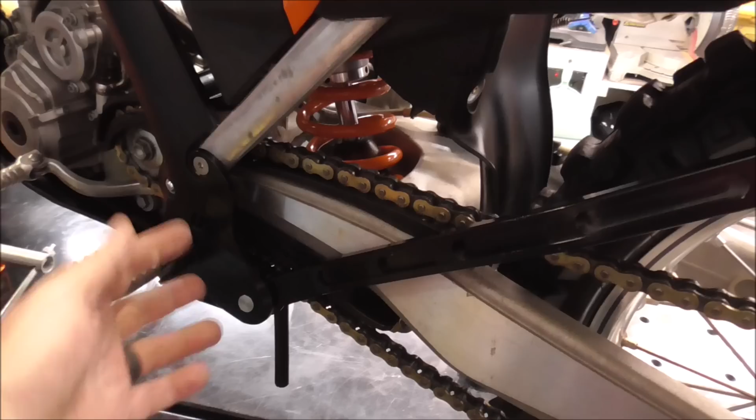So I've got the bike propped up vertical on this table, and you can see the original kickstand right here. We'll have to take it off, and it's got the bottom feet that are screwed in. Well, that would work if we didn't have to cut so much out of it, but as you can see, there's actually a recessed notch in this kickstand, which is going to make this area where we'd have to thread non-existent. We're going to probably end up having to cut it off down in this area somewhere.

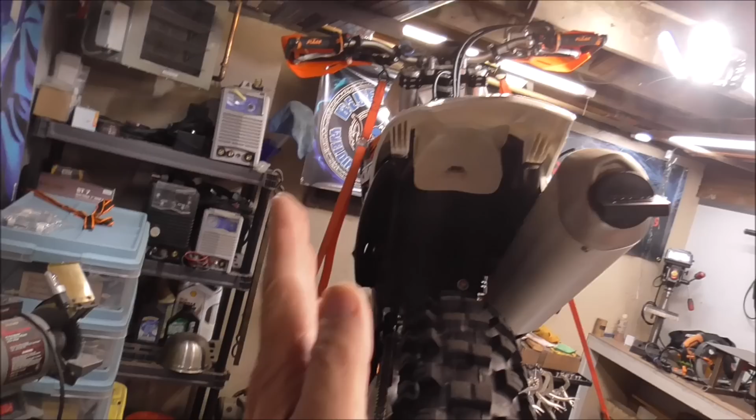Wow, guys, that's going to be a lot. We're going to end up taking off this kickstand. So I've put some lean on the bike a little bit to simulate where I want it to sit. And now you can see how much we got to take off this kickstand. It's way down here, which is about 3 inches that we have to take off it.

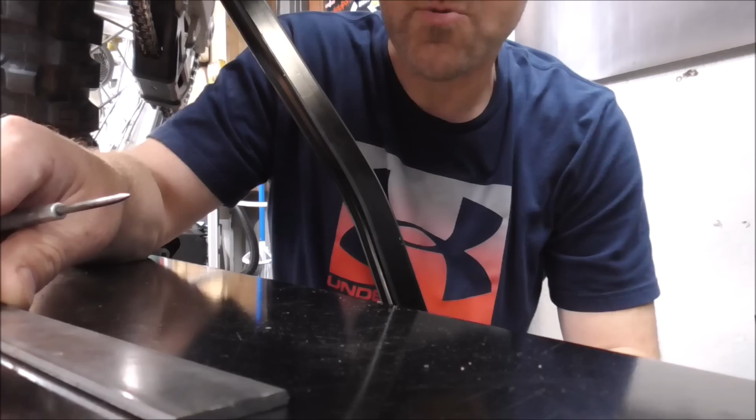So what we're going to do is take a piece of flat bar and just make it contact the kickstand, and then we can scribe it using a scribe right along the back edge and all the way around.

Now we'll turn it, put a mark here. Then we'll do the same thing on the back side with another mark.

You can even wrap it around the front just a little bit by hanging the metal off the front edge, and that'll give us a nice straight line to cut by. Now we just got to take off the kickstand, which is these two bolts, and we can go cut it.

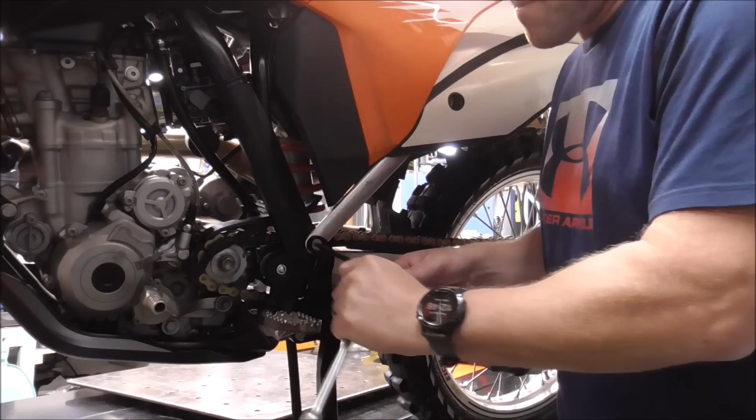And start our fabrication. I think they actually make a lowered kickstand for this bike for doing these modifications, but I had just bought the kickstand.

My wife just recently rode this when we went on a little trip together, and she kind of fell in love with the bike. That prompted me to go look for a bike for her right around this size. I really couldn't find one. We did the next best thing, and I gave her mine, but she's a little too short for it, and I went out and bought myself a new 450.

So everyone really made out. My wife wound up with a bike that's super comfortable for her. It's powerful, and it'll be challenging for her for a little while, and I ended up with a new one for me. This will last her many years to come.

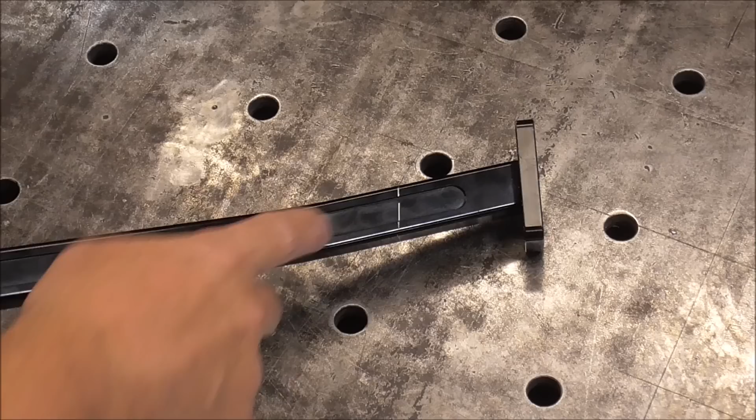Now you can see our cut mark all the way around, and now you can actually see why we can't just re-bolt it on. I had originally planned to just take out these two screws, cut the kickstand shorter, and then just re-drill and tap it. But for obvious reasons, you can see these screws go into this thick meaty part of the aluminum kickstand. We need to cut the kickstand way up here, and these ribs or webs just aren't wide enough to drill and tap into to hold those screws.

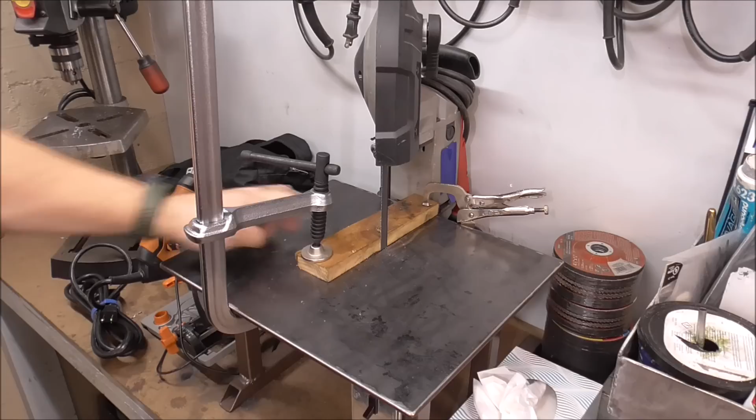The only other alternative is going to be to weld it. What I've done is just clamped a little piece of wood to this table, and I'll show you why, because I'm going to need to feed this kickstand through with this side touching and this side touching here. That cut right there is plumb up and down. That's the angle we need to get the right bevel on this.

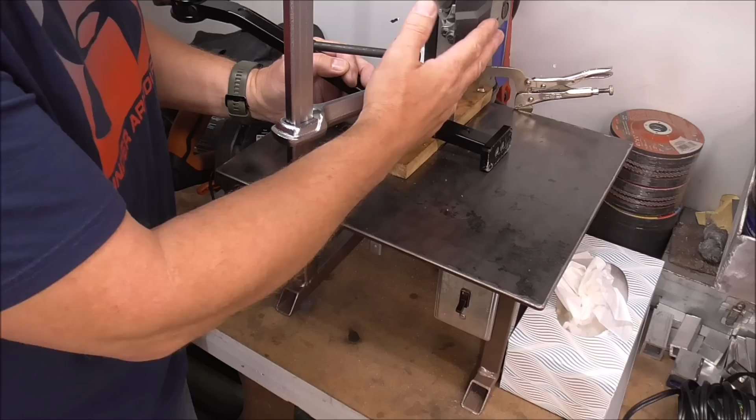All this is, guys, is my portable bandsaw stand that I built. I have the material cut list and all the details about this on how to build it, and I'll have a link to that video. Super easy. So if you have one of these portable bandsaws, this is an awesome tool so that you use your bandsaw all the time, because there was a while I just wasn't really using it. I use it every day now just because it's so handy to have set up like this, and there's only one clamp and this comes right out and can be used like a regular bandsaw.

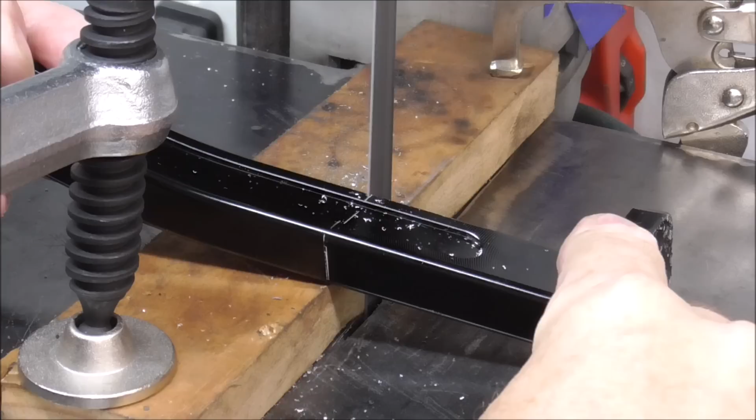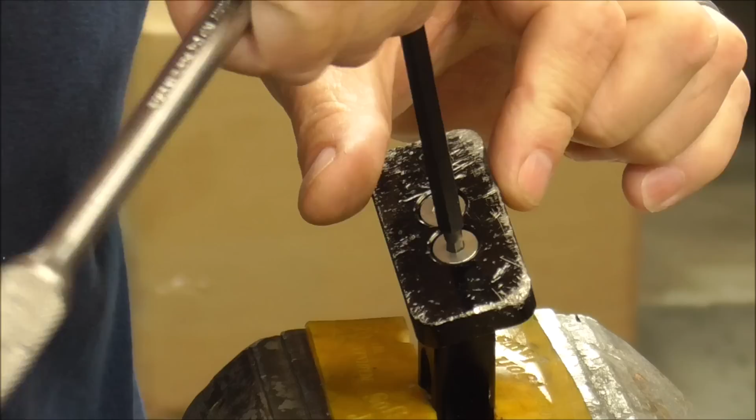Alright, let's cut this up. Now we'll get this clamped in the vise so we can get this foot off. This is the part we need to keep.

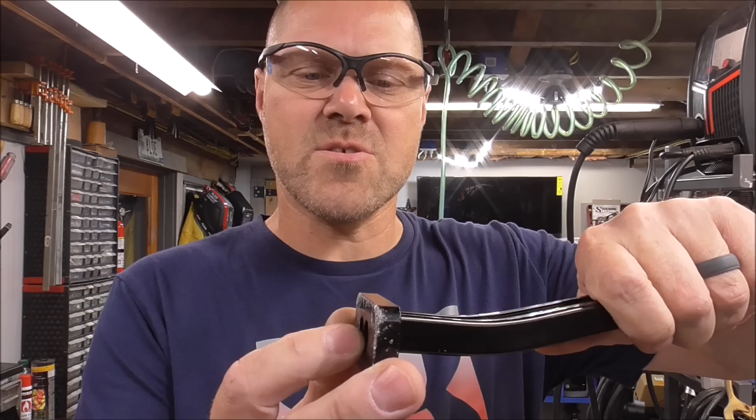Now the next thing we got to do is get this paint and finish off this pad, and get the paint and finish off this so we can weld these two pieces together like this. I'm going to clamp this up in a vise and use a stainless steel wire wheel on it.

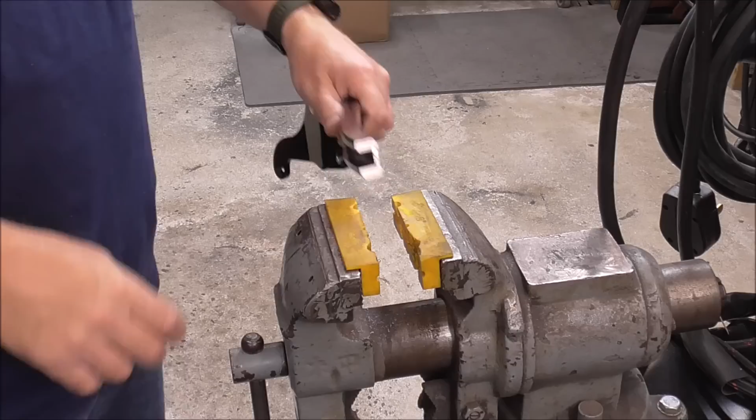Now I'm going to try to be real careful because I don't want to take off way more than I have to. I'm going to end up taking off some, and we'll have to end up repainting this, but it's inevitable. I'm going to do the best I can.

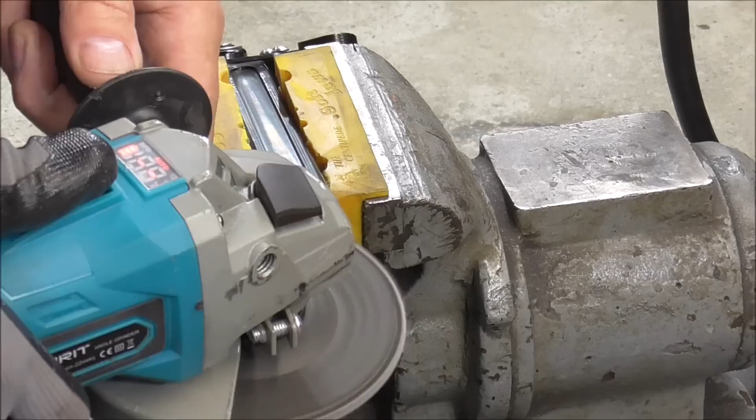Because I know that MIG welding aluminum leaves a big bead, I'm going to V this out just a little bit. You can see I got the edges all beveled back. It just gives the weld a nice place to go. Now I'm going to do a final cleanup with a flap disc just to remove any of the contamination from the paint that the stainless steel wheel might have put into this part.

I'm going to take a minute to talk about the setup. For this I'm going to be using a spool gun, but you don't have to use a spool gun, and I'm going to explain the reasons why.

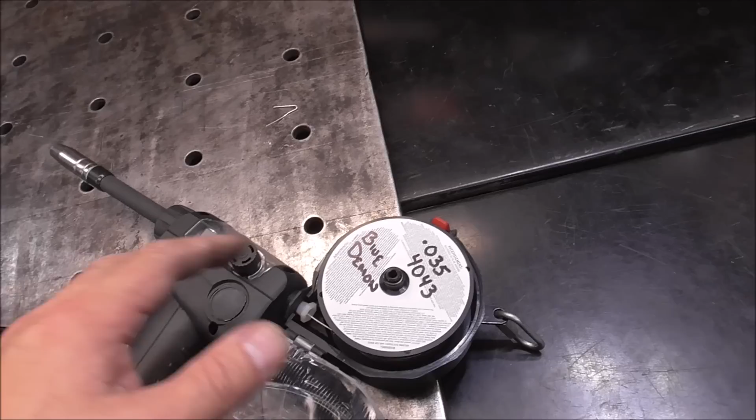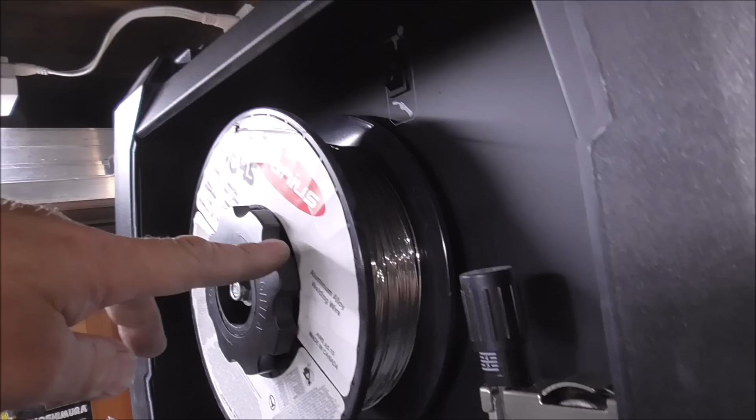I'm using Blue Demon 35 thousandths 4043 wire. The reason I'm using 4043 is that it's a little bit softer. It runs a little bit better. Basically, it just goes in a little bit smoother for me. But you can also do the same exact thing by switching out the liner in your MIG gun for a Teflon liner and then just running aluminum straight through that. I've done that many times. As you can see, I'm all set up with 45 thousandths wire right now to do this.

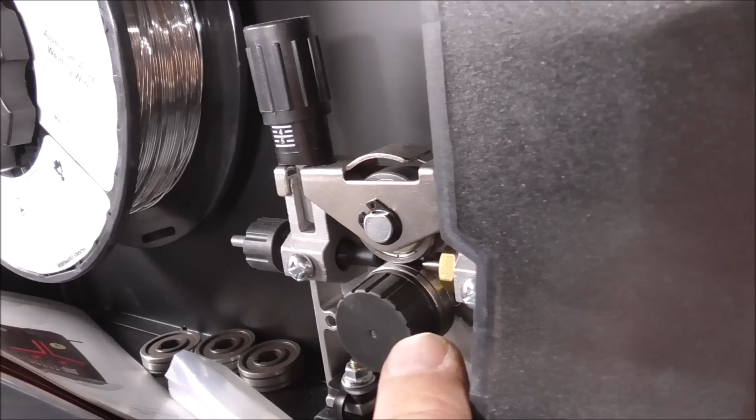Very little things that you have to do differently. You just use a U-groove drive roller that's designed for aluminum, and you're going to want to use 5356 wire. The reason for that is that 5356 wire is a little bit harder than the 4043. If you try to run the 4043 wire through your MIG gun liner whip and it's extending all the way around, you're going to have problems because it's not going to want to feed down through it. 5356 wire is a little bit heavier duty, and you're going to be able to have a lot better results. 4043 wire, on the other hand, is super soft, and it's only got to push from here to here before it comes out the MIG gun.

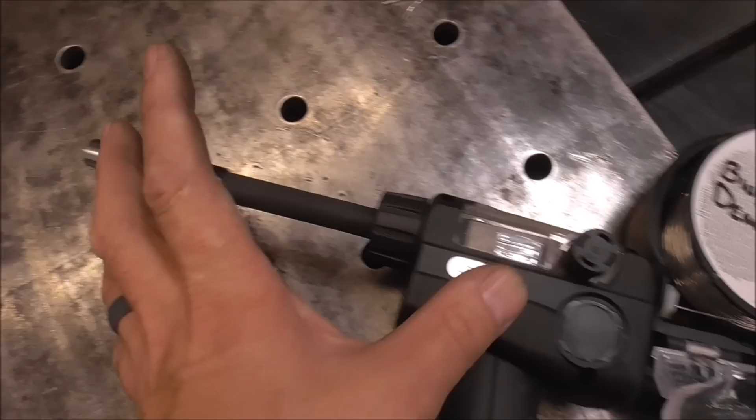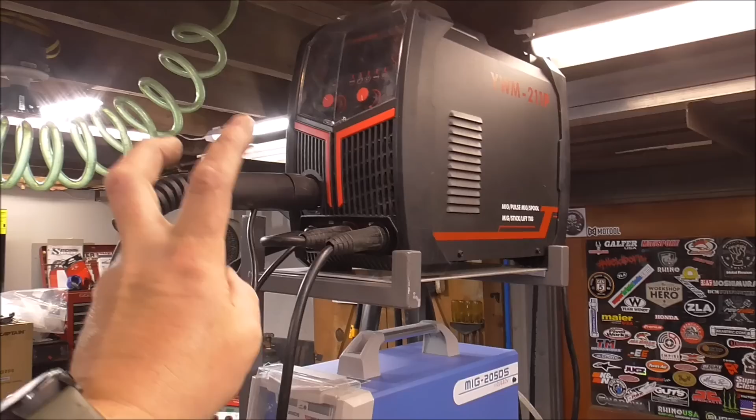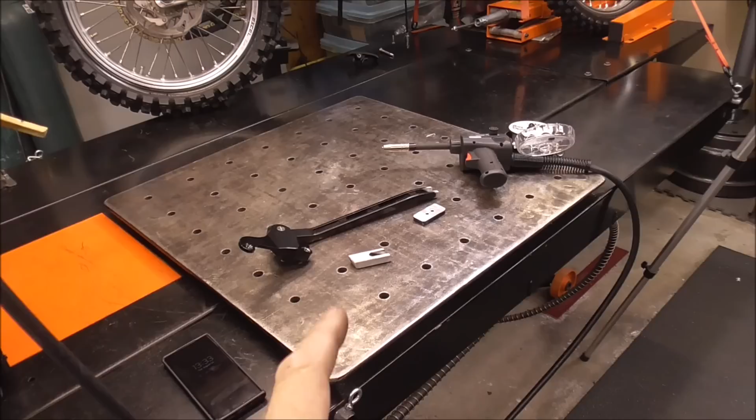That's the advantage of having a spool gun, is that you don't get a lot of the feed issues that are associated with what's called a push style gun. The wire is pulled off the reel and then pushed through the liner, however long that liner is, whether it's 12 feet, 10 feet, or 15 feet. The longer this MIG whip, the more problems you can have with it bird nesting. The spool gun just helps eliminate a lot of those issues.

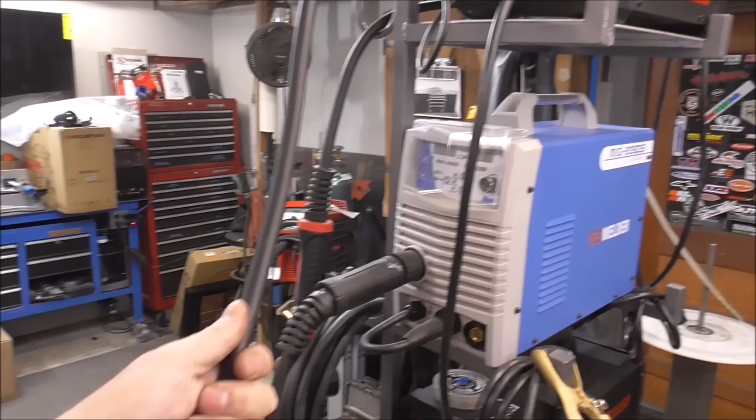But don't get me wrong, I've done a lot of MIG welding with aluminum through the standard MIG gun that comes on it, and you'll have no issues whatsoever as long as you set your machine up properly. I have a video that talks all about that, and I'll link it up above. So for this process, you're going to need a MIG welder, or a MIG welder that's capable of having a spool gun hooked to it, like I have here. You're going to need a bottle of straight argon gas, and you're going to be welding on DC electrode positive.

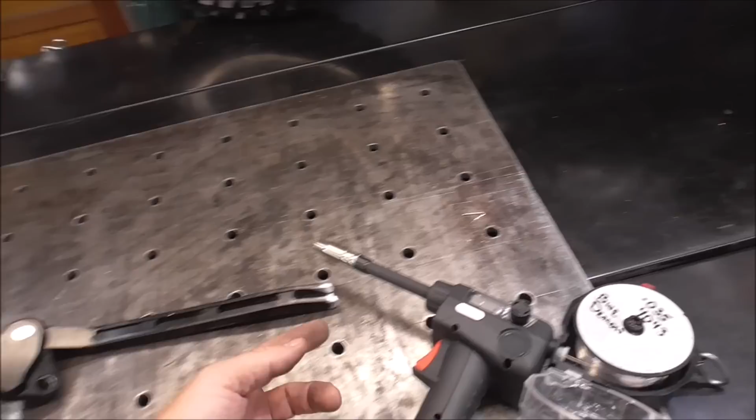Now, a lot of people say, well, I don't understand, why can't you weld aluminum with a MIG welder? I thought you had to have a TIG welder, and it's got to have AC power. It does, honestly, guys, and I really don't know the reason behind that. It just works. This is designed for this. This just works. I think with the AC, when you're doing TIG, you do have that AC sine wave, which helps clean. So for this, I find that you just got to do a lot better job making sure that all your parts are clean, because you're not getting that cleaning action like you do with AC. I'm sure that somebody who's a lot more technical could explain the difference between AC TIG and DC aluminum MIG welding, but that's not what this video is about.

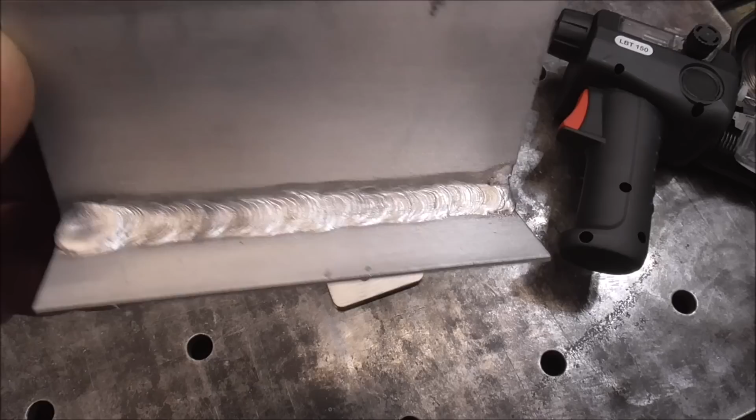I'm just showing you the practicality that you can do it, and it works great, and it actually provides a good looking bead. You can see, guys, this right here was MIG welded. This is a MIG welded joint. It kind of almost looks like TIG. It lays in there nice. You can see it's got good penetration. You can see it actually has on this side some transfer. It's gone through. That's actually not overly desirable, but it does prove that you can get a good bead appearance, and that laid in really nicely right there.

And that was done using a MIG welder, just like this right here. I'm using pure argon, and I've got it set for 30 CFH.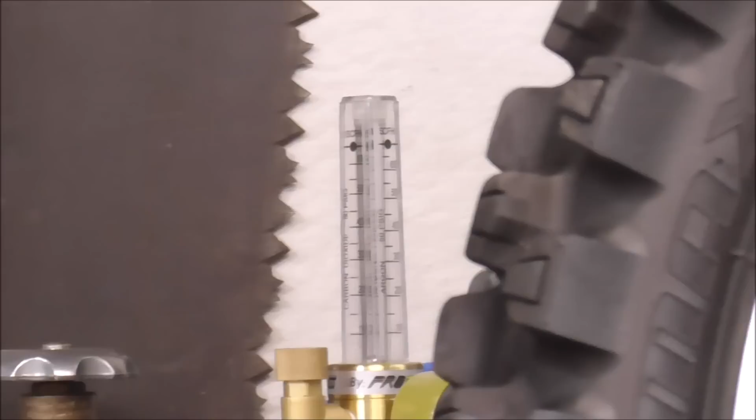I'll pull the trigger over here, and you can see where the ball goes up. There it is right there. I'm using 35 thousandths Blue Demon 4043 wire, and I'm using it on the Yes Welder YWM 211P.

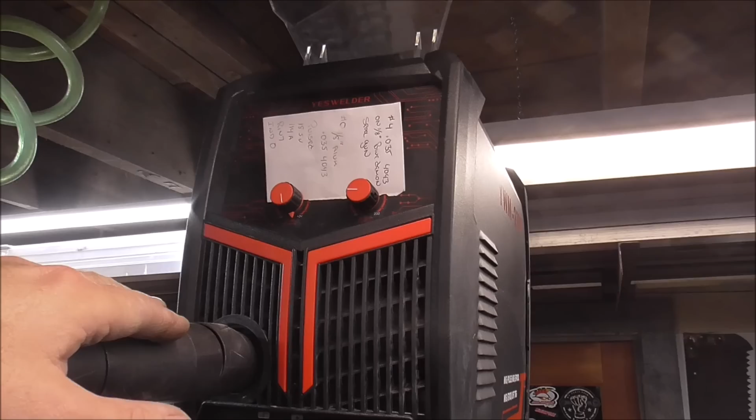You can see I've got a chart that I use for most of my aluminum welding. Once I find a setting that works good, I write it down and store it, leaving this chart right in there.

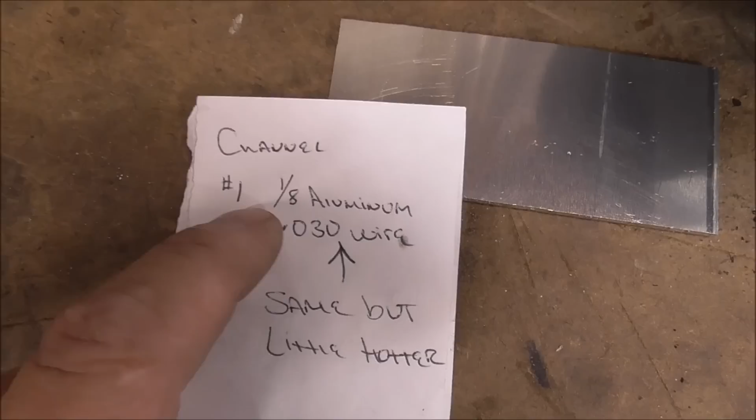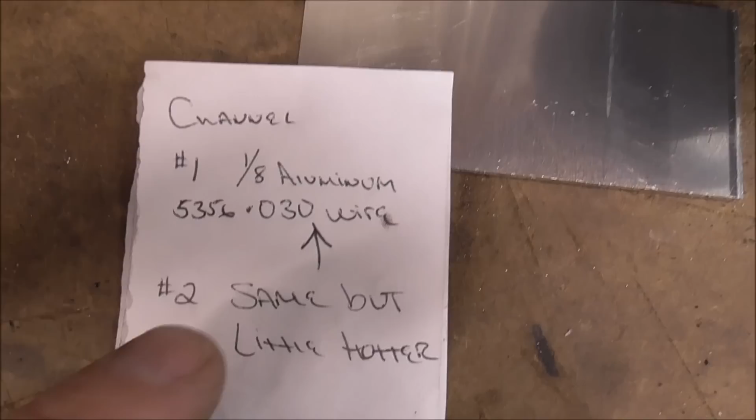Channel 1 is for 1/8 inch aluminum using 5356 wire, 30 thousandths, but that's using it with a liner, not a spool gun. Channel 2 is the same, but a little hotter.

So if I'm doing a butt weld, I may want setting 1. If I want it a little hotter, like for a T-joint, I can set it for number 2, knowing it's the same.

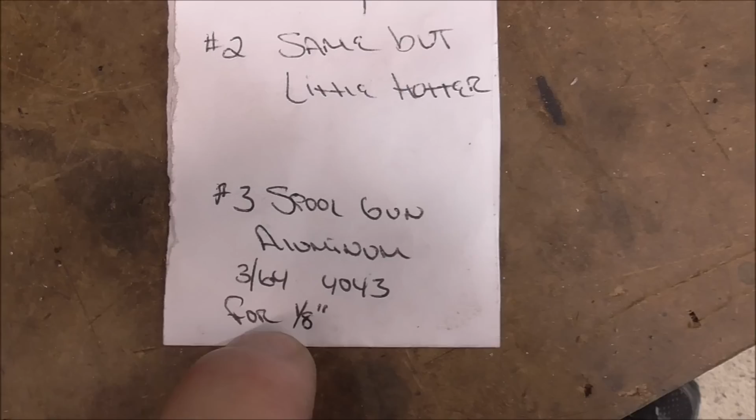Number 3 is for a spool gun with aluminum, using 3/64 4043 wire on 1/8 inch metal. Number 4, what I'm on right now, is 035 wire 4043 on 1/8 inch material, using Blue Demon wire with a spool gun.

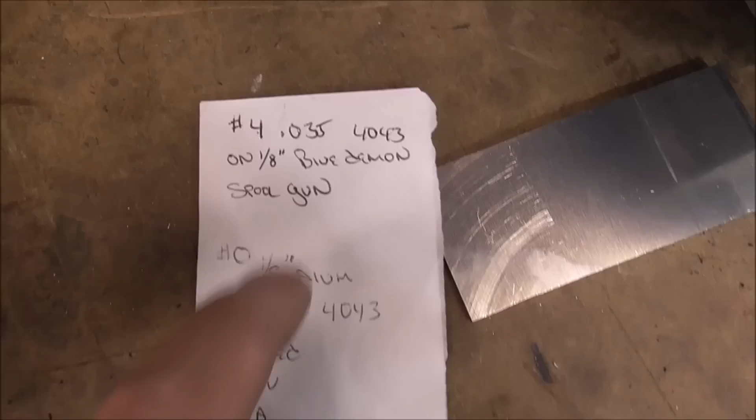Some wires just run a little different than others, so I mark the wire brand I'm using so I know. That's what I'm on right now. Setting 0 is 1/8 inch aluminum, 35 thousandths 4043.

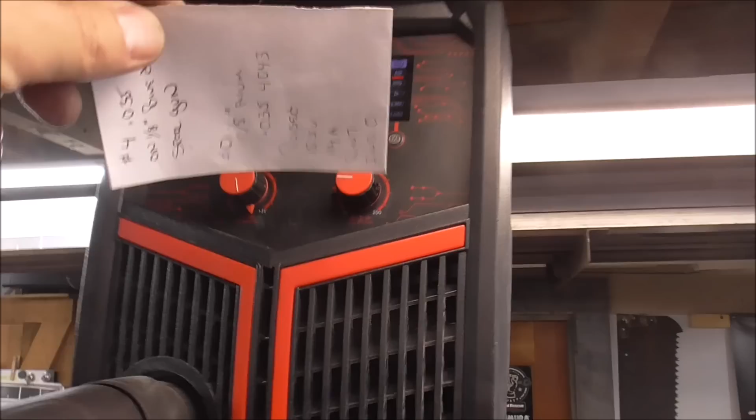That's a pulse setting, and here are my manual settings right down below that. I keep the chart right up here. It's just a real handy way to have everything I need right close by.

I just got to wipe all these parts down last minute with some acetone, and we'll be ready to weld these up.

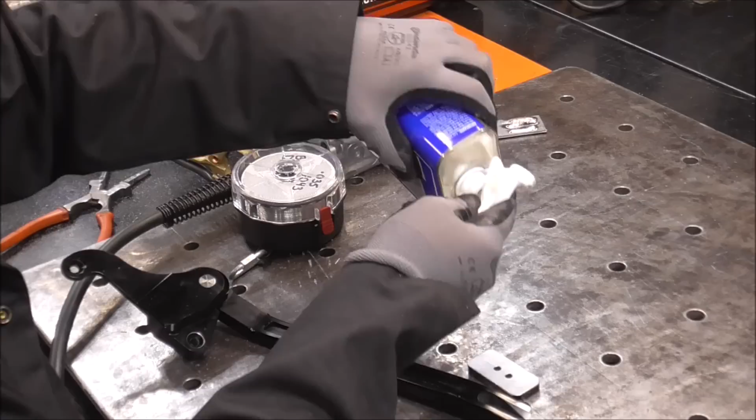Aluminum fumes are really bad to be breathing in, so make sure you're wearing a respirator and that you're in good ventilation. The hardest part for this is going to be just tacking it up. I'm going to have to basically just hold it there and tack it on the inside, then move to the outside to weld.

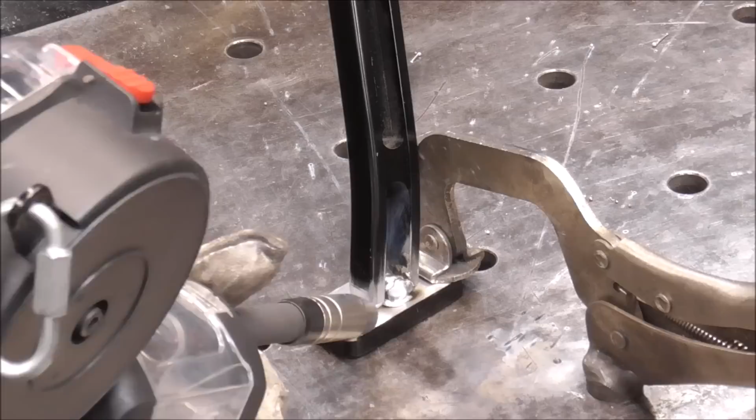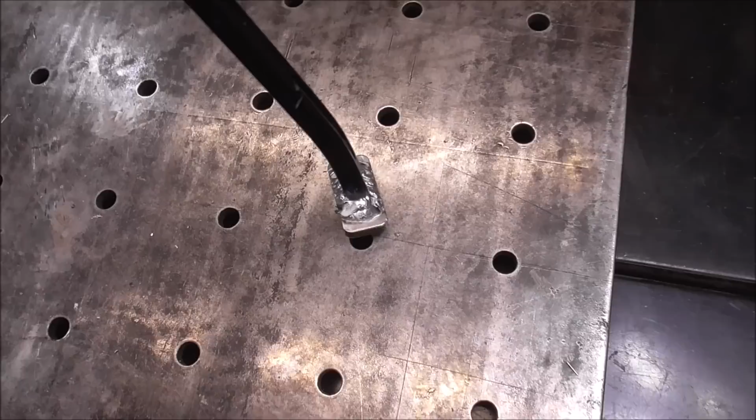It did not come out the way I was hoping at all, guys. Whatever it was, I could not get this to weld, so I ended up doing like 3 passes on it. It doesn't look great, but all it has to do is hold this pad on the bottom of this foot of this kickstand.

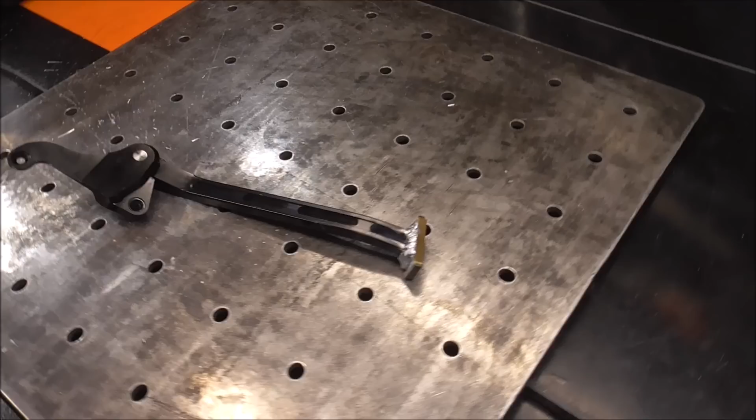So what I'm going to do is go back and just blend it all in. You know what they say, grinder and paint make you the welder that you ain't, but not all stuff can be welded perfectly.

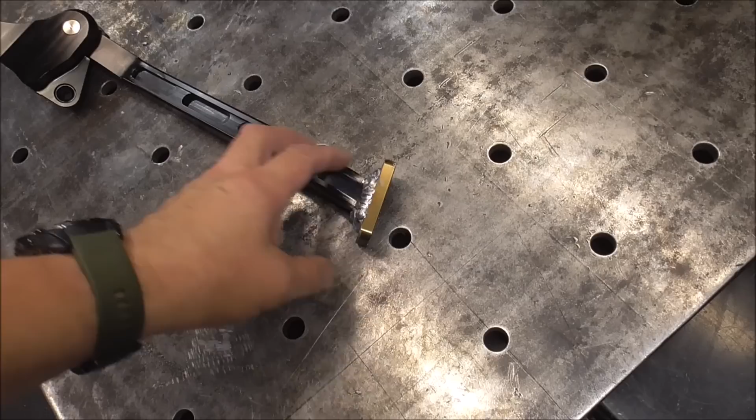I don't know what this is, could be old pop cans for all I know. Obviously there was a reason why this foot was bolted to this, because they could have easily cast this all as one piece, but they didn't. And as soon as I put heat to this, it acted as though it had all kinds of trash in it, like it did not want to weld.

I'm actually glad this happened, because in the welding community and people who make videos, it's easy to look as though everything is always perfect and comes out great and there's never any problems. Then you guys go to do the same thing, try to duplicate it, and you can't figure out what you're doing wrong.

This is the reality of welding, guys. Not everything is going to work out perfectly, whether the material isn't good or you don't have the experience. You're going to encounter these challenges, and this is just a perfect example of some of those challenges.

But a lot of times it's about overcoming it. You know what they say, probably you've heard, grinder and paint is the welder that you ain't. But a lot of times that's what you have to do. The options are to grind it out and start over, or do what I do here.

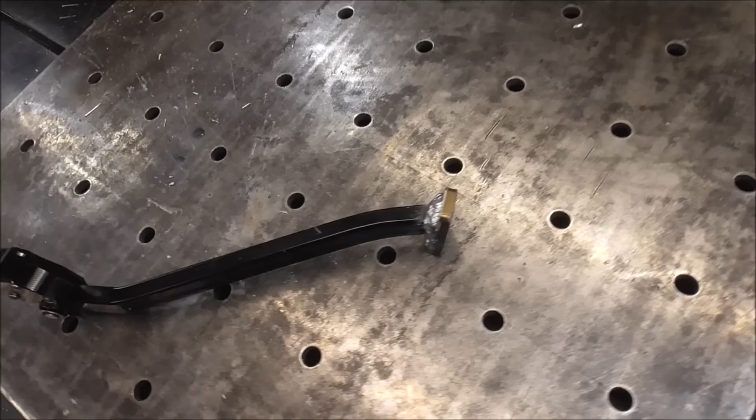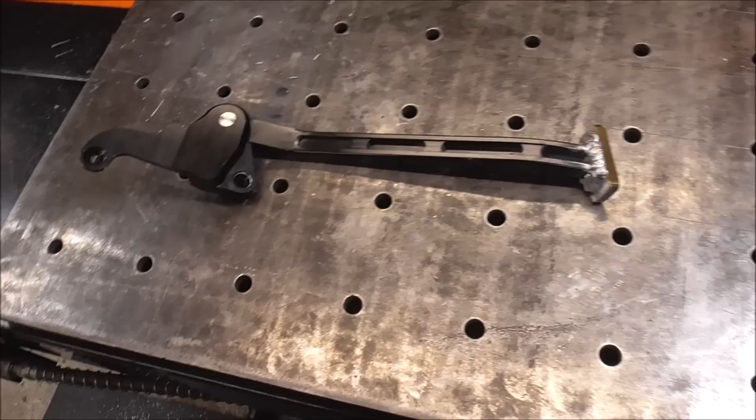It's not structural. All this has to do, guys, is hold a foot on the end of this kickstand, and although it doesn't look good, I'll make it look good. Rather than going out and spending another $125 for a custom kickstand, I've done this for free, and it'll look just fine on this bike. Trust me, it'll look great.

But it is a great example of everything that can go wrong in welding. And if you have the right settings, a known material, and the right metal, you can actually make it look really good. When you're MIG welding aluminum, 1/16 of an inch is really pushing it.

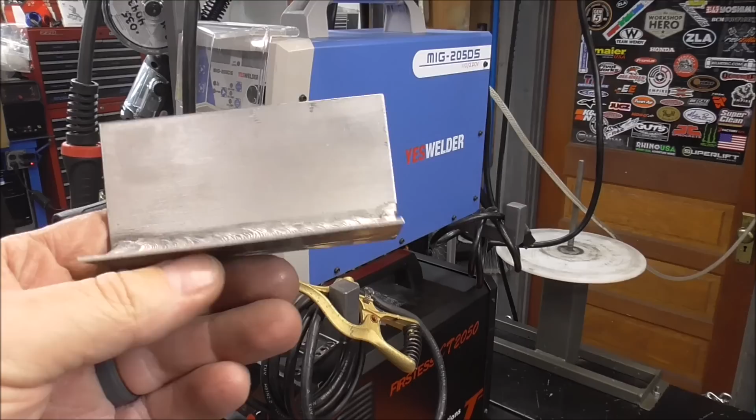That's right on the edge of burning through and blowing out. And you can see on the back side here that this transfer actually went through.

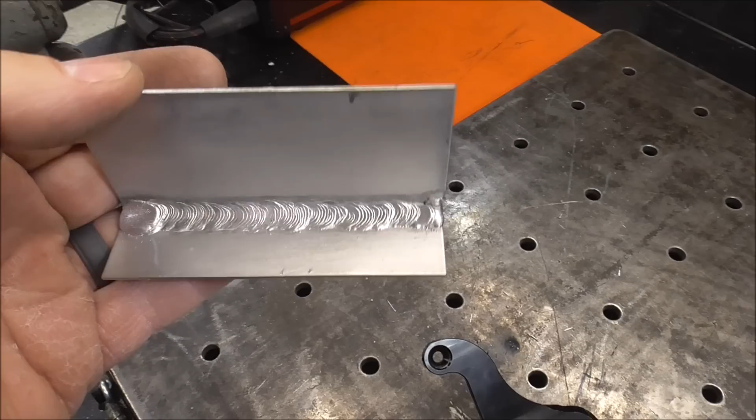That's not desirable, but it does show that it's making penetration. The thicker the material, the easier it is when you're MIG welding aluminum. Just know that 1/16 of an inch material is right on the outer edge of what you're able to do. I'd say probably 1/8 inch to 3/16 inch is the sweet spot when MIG welding aluminum.

A lot of people would cut this out and not show this part, but again, this is realistic stuff. These are realistic things that you're going to encounter. It's all a gamble sometimes when you're welding on unknown material, especially aluminum, that you don't know what it is for material and how it was cast.

So let me blend this in, make it look a little bit better. We'll get some paint on it, and then we'll get this bolted back up on the bike.

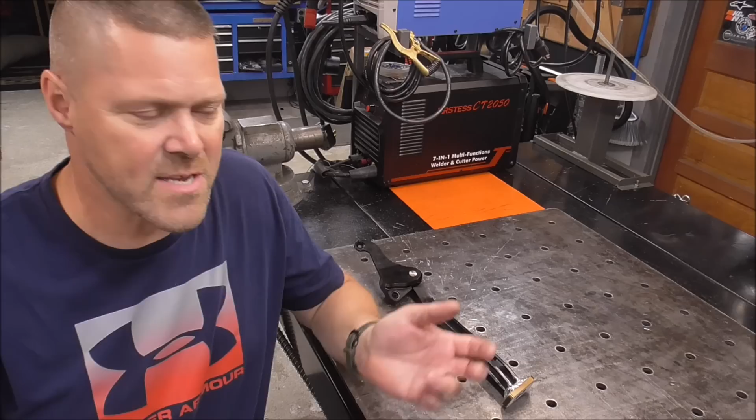Although I'd like to show you guys how great every little project is that I do and how awesome and trouble-free everything is, that's not how it works out. And you guys following this channel, picking up welding or just starting out, know that's the case too. So what you're experiencing, and sometimes the frustrations you see when you're trying to do something and just want it to look absolutely perfect and can't figure out why, sometimes a lot of that's out of your control.

Some of it is just you need to practice a little bit more, but this could be a little bit of both as well. But maybe if all I did was weld aluminum and nothing else, I probably could have come up with some tricks and settings and things to do that would help me be able to weld this material part.

It must have something in it. I don't know, it could be old pop cans for all I know, but there's obviously a reason why they elected to bolt this foot to this piece of aluminum. Gave me some problems, but we're going to overcome that.

I just want you guys to know that if you're struggling during welding and you're just not getting it, try not to get frustrated. I know it's super easy, especially if you're a perfectionist and you just like to get things done perfectly every time. I'm kind of a perfectionist and I just want to be perfect at anything I set my mind to, but that's not reality, guys.

As much as we strive to do a good job and be perfect all the time, you just can't. It's not reality. So you do the best that you can with the knowledge that you have, and part of welding is adapting and overcoming and fixing.

For this, if this was a structural part, I wouldn't use it, obviously. If this was a customer's job, they wouldn't get charged for it. So maybe lucky them, potentially. But this is my part, and this is my thing, and I wouldn't take on a job if I didn't think I could do it anyways.

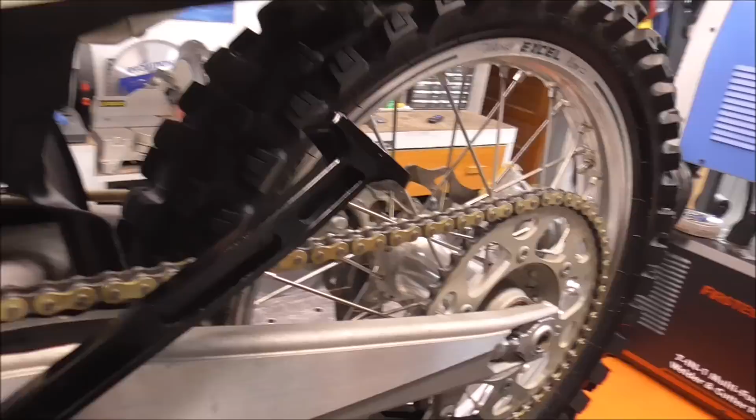That's how you take a not-so-perfect job and kind of turn it into something a little bit better. A bit of grinding, a little bit of fingernail polish for paint, and it comes right into it.

And another great thing too, guys, if you ever were to take this link out, you could always now tap this, drill and tap it, and then just put a 3-inch block on the bottom of it and bolt it right to the bottom of this stand. It would be light enough because it's aluminum, and then you wouldn't have to do anything new as far as the kickstand, because this is plenty thick that you could just drill and tap into it, and that'd work perfect.